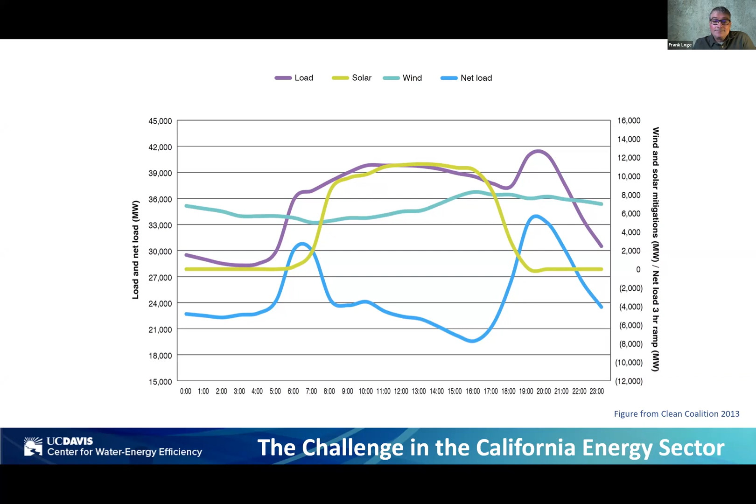This is because of the integration of renewable energy into our statewide electric grid. The problem is that as this belly gets deeper, it's very hard for the statewide grid to provide electricity during this ramping period, which occurs around 4pm and extends until about 8pm. This ramping period represents when everyone gets home from work and turns on lights and starts cooking and other things.

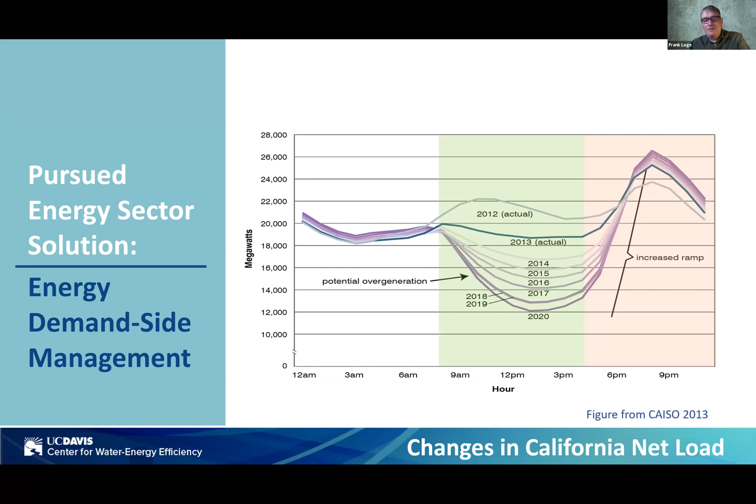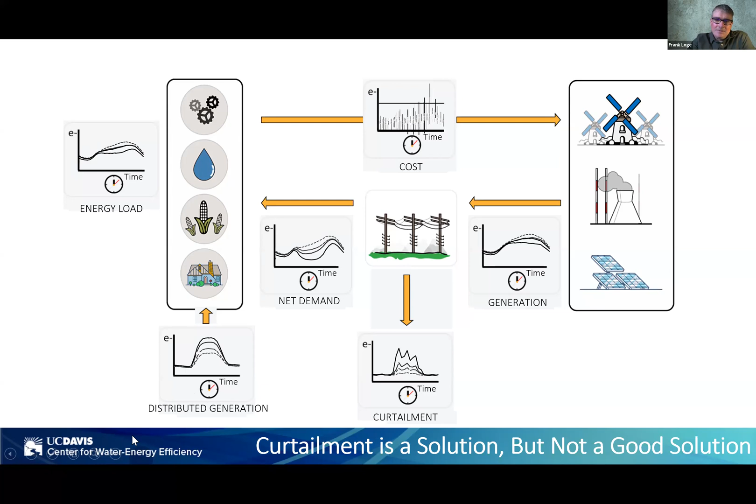You also have distributed generation of electricity, through wind and solar. So the schematic down on the bottom left is showing the electricity that's generated through renewable sources.

Hold on, my screen, I just have a technical detail I'm going to have to fix here. Excuse me just for a second. Sorry, my screen is frozen. So this is one of the challenges from working at home because I have no IT support to help fix this problem.

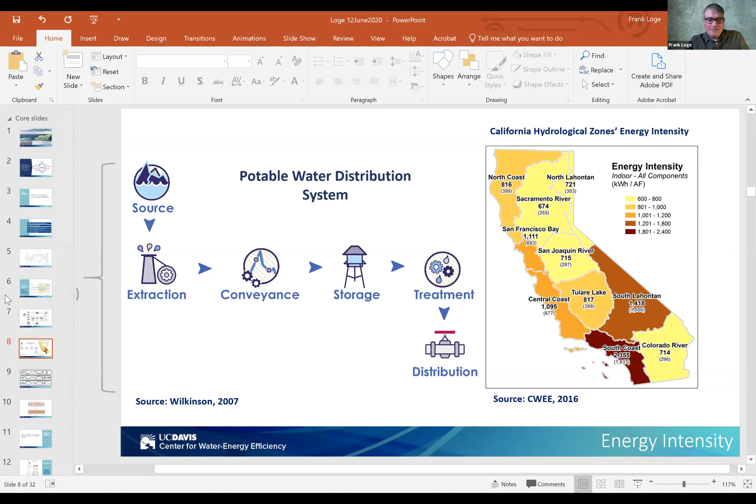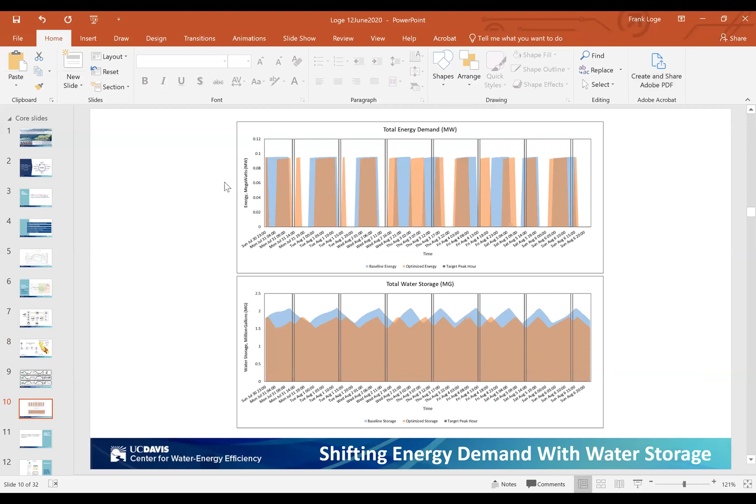Professor Loge, is there something we can help with? I don't think so, I can't advance my slides. We're seeing the slides and that they are advancing. Maybe they are advancing. Yes, they are. Oh, okay, then my screen on my side is completely frozen.

Monica, can you go ahead and discontinue sharing with me real quick, and then I can also share the presentation, Frank. Let's just see real quick if you could just stop. Monica, if you could just take the screen from me. Sure, real quick.

There is Professor Jurgen, if you have the PowerPoint presentation maybe you can start sharing. Do you see the presentation? Yes, we can see the presentation. Professor Loge, can you see the presentation? No, I just still see my frozen screen.

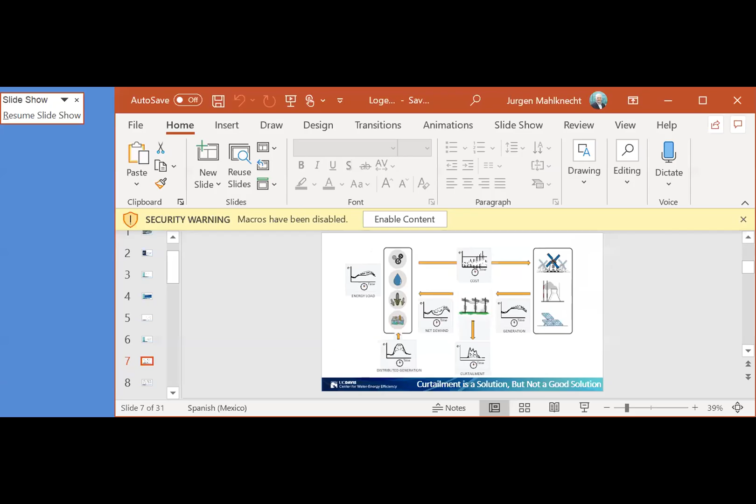Okay, don't worry, we can take a 5 minute break. Maybe this can be fixed if you leave the meeting and come back again, if it's possible. I don't know how your computer is. Yes, I'm sorry about this. Okay, I will do that right now. Yes, thank you.

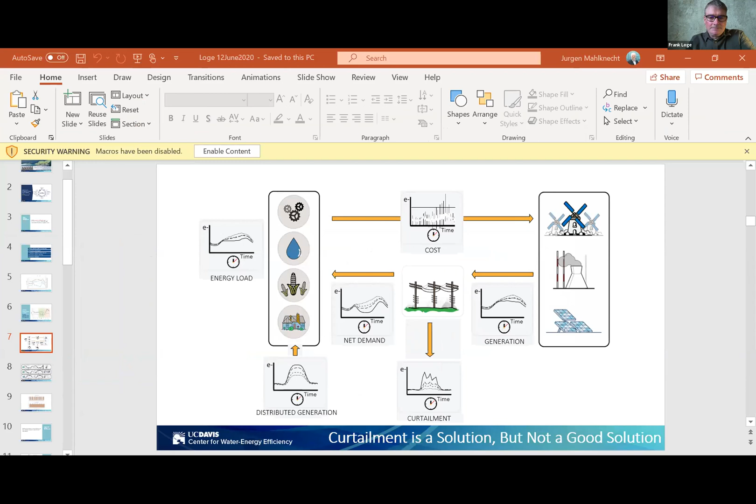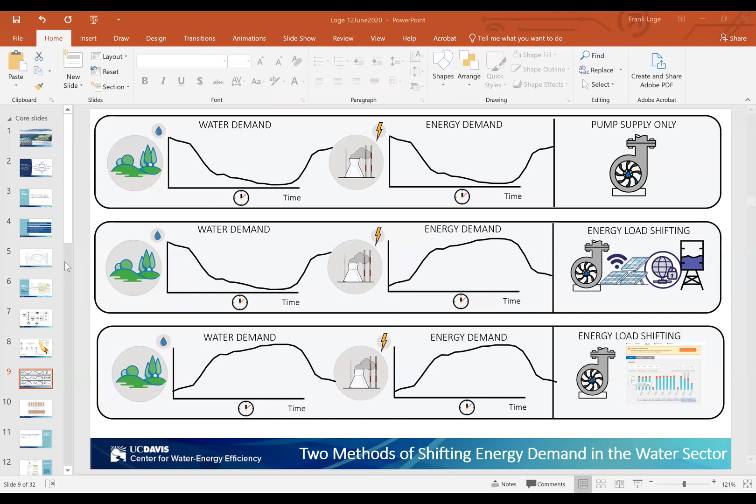Professor Jurgen, maybe while Professor Loge reconnects himself, you can tell us something about the water center in Tec de Monterrey. Okay, actually... okay, it's unfrozen. So let me, let's try again. If there's a problem still going on, I will disconnect Facebook Live. That would be easier, there are not so many people on Facebook Live. Okay.

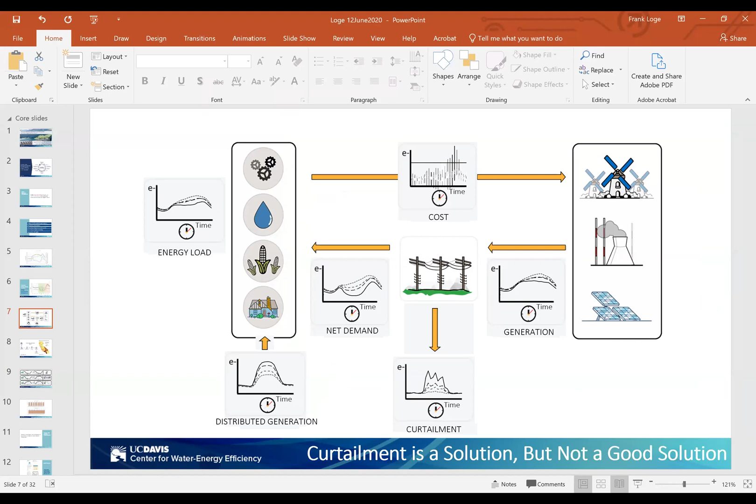So coming back to this, this is the worldview of the operators that operate the statewide electric grid. In this box right here, you have demands, the demand of electricity from these different sources. You also have distributed generation of electricity, through wind and solar. If you add these two together, you end up with the net load or net demand, which is shown over here, very similar to the slide I just showed you previously.

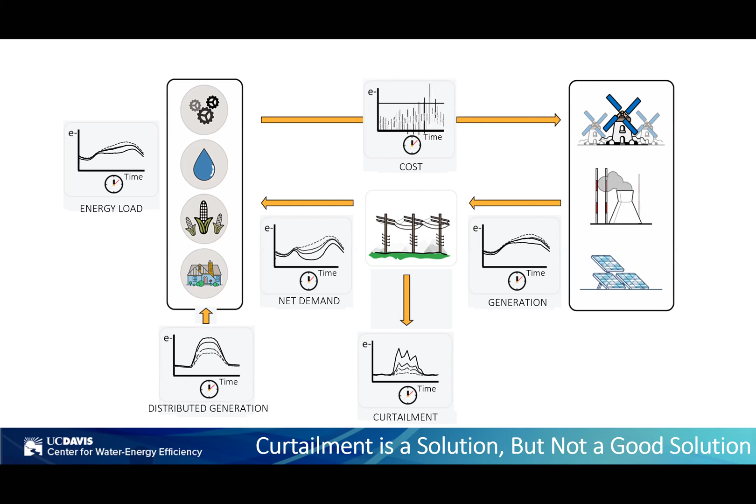On this side of the screen, you have different sources of producing energy. Here I have shown wind and solar, but also this could be a coal-fired power plant, a natural gas power plant, or a nuclear power plant. These different sources produce energy that goes onto the grid, and the energy that is produced needs to match the net demand.

If these two don't match, then what happens is we enter into a process called curtailment, where some of this electricity is shed off the grid so that this electricity profile matches the net demand. These two have to match each other because you do not want excess electricity on the grid - that'll cause things to break. And you don't want less energy on the grid because then you'll have brownouts or blackouts. What we're finding in the state of California is that curtailment is happening more and more often as we put more and more renewable sources of energy on the grid.

Why curtailment is bad is that we are not using that electricity. So in the state of California, when we curtail electricity from our grid, what we're doing is giving it to another entity, most commonly the state of Arizona. And what's surprising is that we don't charge them for that electricity, and we don't give it to them for free. We actually pay them to take our excess electricity. So curtailment not only comes at a cost to California, it's also bad because we're not using the renewable energy we're generating. We're actually paying someone to take it. This makes it very challenging for us to add additional renewable energy to our electric grid because we don't have the ability to use it when it's generated.

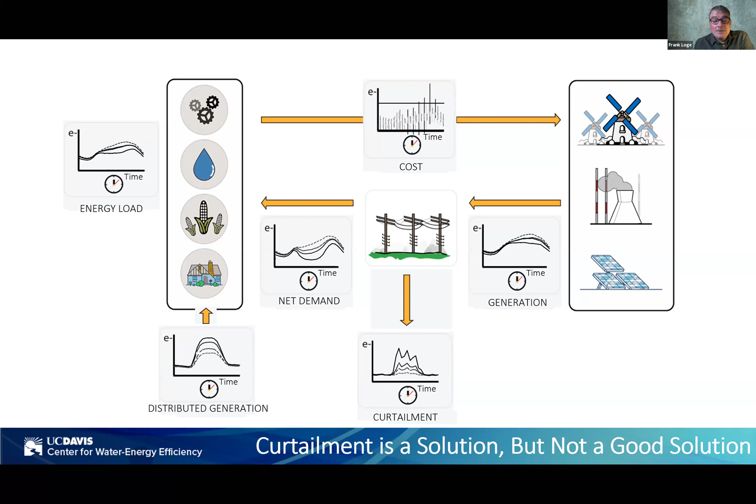So that's the big challenge with the integration of renewable energy into electric grids.

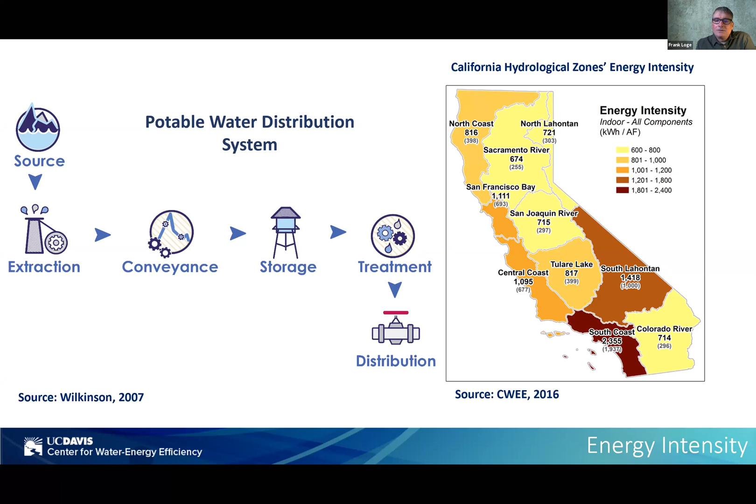So the focus of this webinar is to look at how we might shift when we use water in an effort to shift our electricity use in water and wastewater systems. The potential amount of electricity we could shift is 20% of the overall state's electricity use, which is quite large. Now, there are two different ways that water systems can shift their electricity demand.

So when there's less water demand, there's less energy needed for the water system to source the water, convey it, store it, treat it, and then send it to the customer. When there's a high water demand, there's a higher energy use. Generally, water systems of this type operate with pumps to move the water from its source to its final location, and pumping is primarily the user of electricity in water systems.

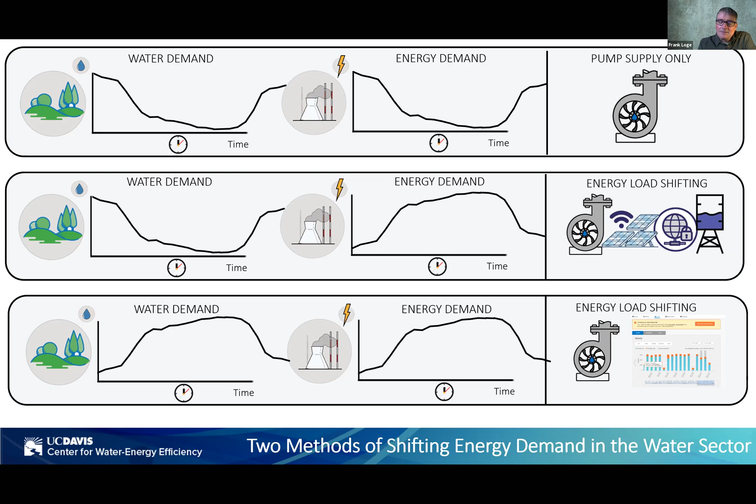Therefore, we would like you to shift how you use your water. That's the topic of today's webinar. I'm going to go through 4 case studies, if time permits—I'll certainly get through three. These are case studies that illustrate different ways that water agencies can help encourage water customers to shift when they use water. By shifting water, they are shifting the electricity needed for that water, which is helping the integration of renewable energy into the electric grid.

So the first example I will give you is an ongoing project that we have with the East Bay Municipal Utility District, which is in the San Francisco, Berkeley area of California. It's a very large water utility, and they are actively attempting to practice water demand management through what they refer to as water reports.

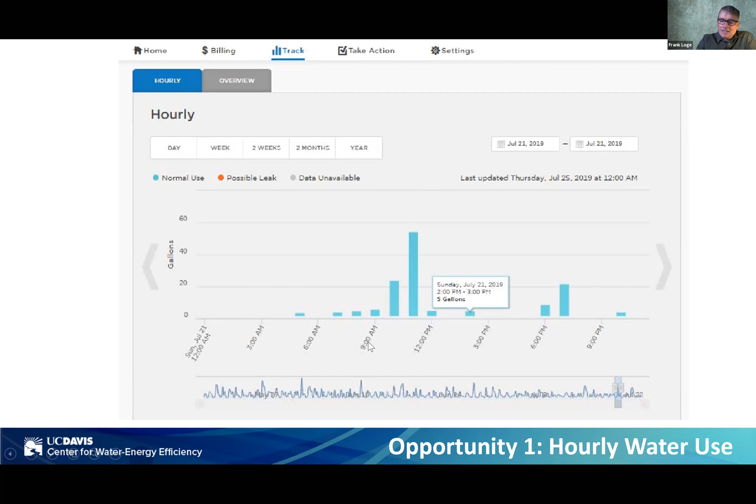The messaging also provides information on how you compare to people like you. The definition of like you, I can get into at some point if you'd like. This right here is this account, so this is me. This is the average of people like me. And this is the best person in that group. So it's comparing me to the average and to the best person. The intent is that if I can understand how I'm doing relative to others like me and the best person, this information might begin to motivate me to change my behavior.

This is a frowny face, if you can't tell. If I were this person, I would have a big happy face. And if I were this person, I would have a somewhat happy face. What they've found is this type of messaging is very effective because inherently we are all very competitive, just being humans, and we like to be good at whatever we do. So this type of messaging has proven to be very effective in encouraging people to modify their behavior.

The one other example here, they do send alerts. This is just an example of one type of alert they send, and this is a leak alert. They send this alert in two different ways. Over here on the left is just a very simple message they will send saying, hey, we think you have a leak. It's estimated to be at 609 gallons over 23 hours, and it's about a 27 gallon per hour leak.

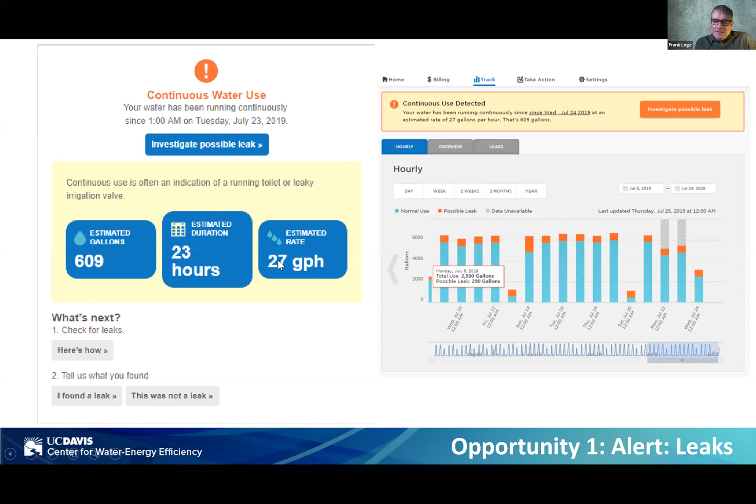So East Bay Municipal Utility District rolled this water report software out to all their customers. They have about 300,000 customers in the Bay Area in California, and they've done this as part of a pilot program to understand whether or not it's effective. The graph I'll show you next is data obtained as part of this project. This is an ongoing project, and this data is about 4 days old. One of the bars is not showing up for some reason.

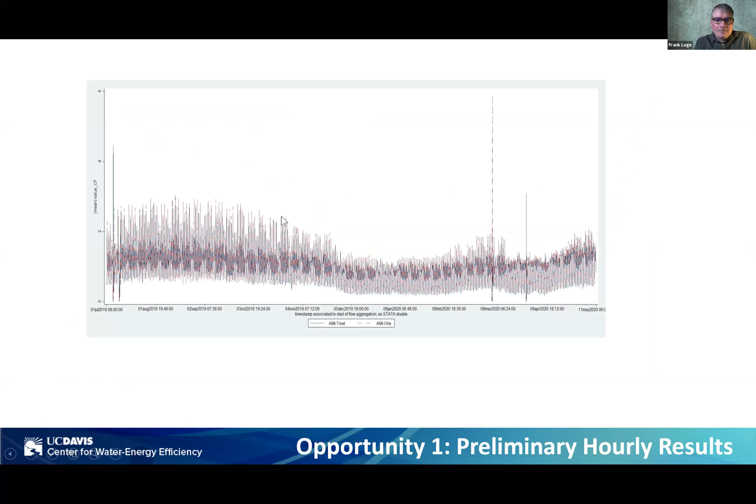Right around this period, if I were to draw a vertical line down, this is when they made the portal active. What's shown here is water use, expressed on a 100 cubic foot basis. So 1.2 is 1.2 times 100 cubic feet. We call it CCF, it's really confusing, I know. This is how we deal with water volumes in California, but it's 100 cubic feet of water, and shown here are different days over the course of the study we've collected data from so far.

So right around here is when this water report was rolled out. Shown in red is a group of people who did not receive the water report, and shown in blue are the people that did receive it. What you'll see is once the report was rolled out, there's a separation between the red and blue lines, which indicates that the water report is helping reduce water use. That difference is on average somewhere between 4 and 6%. So by messaging water customers information about what water utilities would like them to do, you can begin to get responses that make customers shift their water demand.

And through this process, you can have messaging that encourages water customers to shift when they use water, so that you can modify how the water utility uses electricity to help the water utility use electricity when there's quite a bit of renewable energy on the statewide electric grid. Why that's so important is that it keeps that renewable energy on our grid so we don't have to pay someone else to take it off our grid. The example I gave was the state of Arizona.

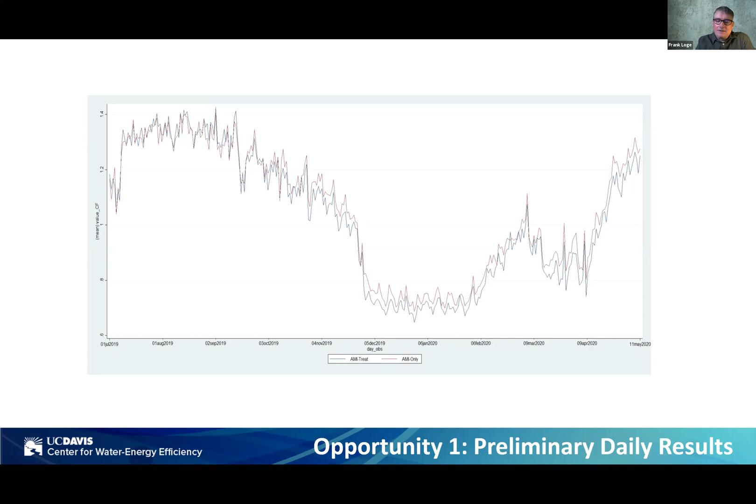The next case study I'd like to highlight is an opportunity for helping encourage water demand management as a way to shift electric load. The example is high resolution hydraulic modeling, and how that can help identify specific customers to target in your messaging to help get some sort of response. The response we'd really like is for water customers to shift when they use water, to shift when electricity is needed.

Shown here is the water use for different sectors, in this case for the East Bay Municipal Utility District. They have residential indoor water use, irrigation, commercial, industrial, public, and institutional, and the darker green line is the total water use. This is the water used in million gallons, expressed as a function of time over the course of a day. The main point is that different water customers use water at different amounts and at different times throughout the day.

So you can begin looking at a graph like this to understand the messaging I just showed you, these water reports. You might not want to message all your customers around their water use. You might want to target a specific class of customers that either uses a lot of water, or uses a lot of water during a certain time of day. All this data is not from a hydraulic model - this is just empirical data collected from the water utility.

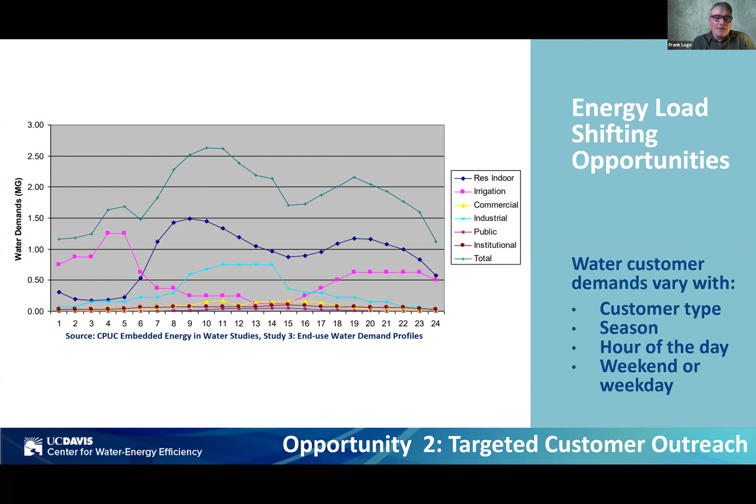What hydraulic models can help do - and this is an animated feature here - is shown with this pump within a particular area of the East Bay MUD service territory. This pump is providing water to each of these dots, which are connections where water is taken off. You can think of these dots as either a residential house, a commercial building, or an industry. The hydraulic model develops a forecast of how this water is moving throughout the water system. The red represents the dots that receive a lot of water from this pump, and the dark blue represents areas within the water system that receive none of the water from this pump.

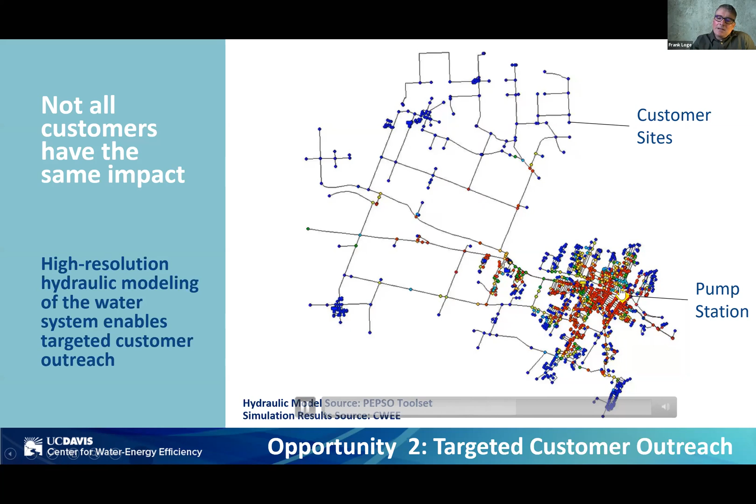So if your goal is to shift the use of electricity for this pump, you can use this model to specifically target your messaging just to the customers represented in red on this schematic. The hydraulic model, through high resolution modeling of how water moves through the system, can now help target that messaging to the actual customers that will have the greatest impact on electric load shifting for a particular asset. In this case, the asset was an individual pump, but you can define how you target water customers based on multiple assets and a whole range of criteria.

Why this has become important is that messaging through social media or electronic means like emails or web portal access is low cost and easy to do, and you can target an entire city, but the uptake rate of that messaging is generally very low. So I might provide the city of Monterey a web portal for everyone to look at their water use and message around that, but the actual number of people who look at it is generally very low - on the order of 5 to 10% of a community. Whereas if you send everyone a physical mailer that comes in the mail, the uptake rate is generally 100% because everyone gets it.

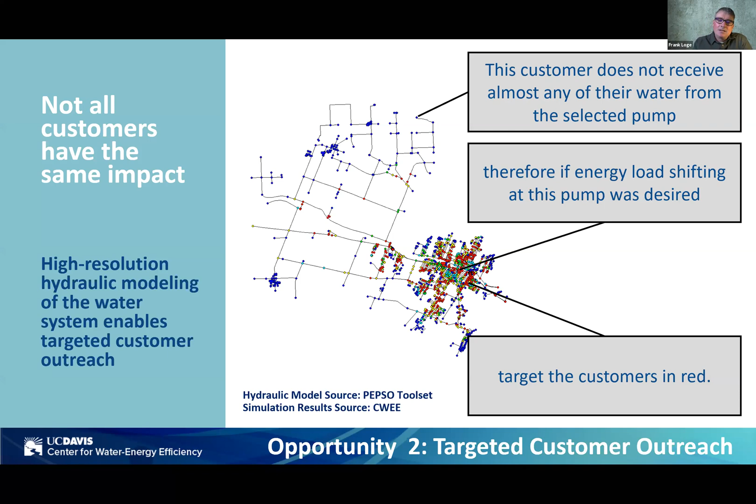A very large number of people will read that, which is what we have found. But mailing things comes at a cost. So having information about where to target those mailings is highly effective at helping reduce the cost of a program you might roll out, messaging around how water customers might use their water in different ways.

The third example I'd like to talk through is irrigation scheduling. I think this is somewhat intuitive to understand, but if you schedule when irrigation occurs, this is a direct way to manage water demand by scheduling when irrigation occurs and does not occur.

This was a project that we worked on with the Moulton Niguel Water District, which is in Southern California, right next to the city of Los Angeles. This is a representation of their water system, which receives recycled water. They collect their wastewater, treat it to a very high degree, and put it back not into the potable water system, but into a recycled water system, sending that water out to irrigation customers.

This is their service territory, and each of these green dots and gold dots are accounts that receive some of this recycled water and use it for irrigation. These P's here are parks, but all the other green dots are other types of users receiving recycled water for irrigation purposes. So they have quite a few users of recycled water using this water exclusively for irrigation.

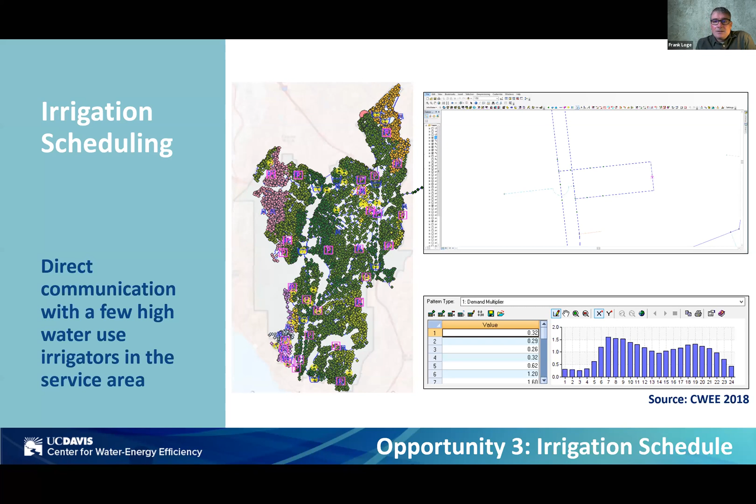This is a great example of an opportunity to target all these different customers to encourage them to time their irrigation to correspond to some criteria the water agency wants to achieve. In this case, we're interested in shifting the timing of their irrigation to shift the electric load within the water system. Shown here is the total amount of water used across all accounts, expressed as gallons per minute as a function of time over the course of a typical day.

The hashed part here is the existing demand, and the part shown in gray is the demand once shifted. So what we've done is encourage people to shift their irrigation out of this time period and over to this other time period. You can see the amount of water we've shifted is actually quite small, and I'll show you some results of shifting a small amount of water. These results would be considerably greater if we had encouraged water agencies to shift more water.

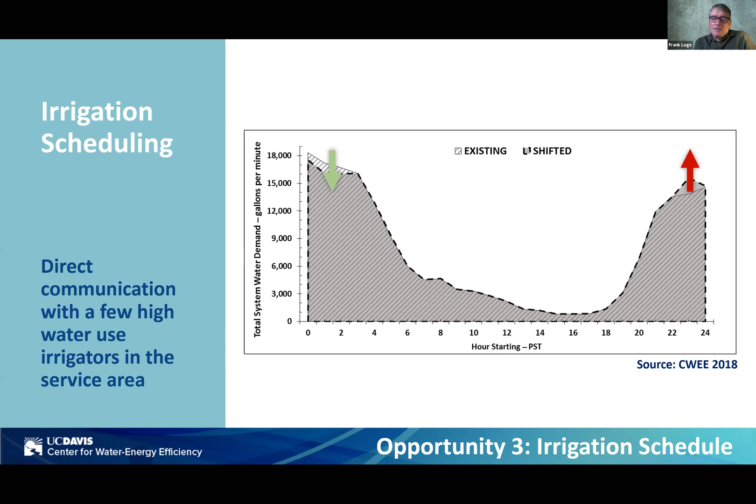The challenge we found is that most of the very large water users in the Moulton Niguel service territory that use recycled water are golf courses, and it's very hard for them to water in the middle of the day when people are playing golf. Currently they water mostly at night. So our ability to shift a large amount of water in the service territory was limited by a few very large users that did not have the ability to shift water, but for those that did, we shifted that water.

I'll show you two schematics to illustrate this. First, we went through and took their existing recycled water system and optimized it to maximize the amount of water stored in reservoirs and containers to help shift electric load. Then, on top of that, we shifted demand by reaching out and encouraging people to modify their irrigation timing. This line shows the results of total water pumped, total energy consumed, and total greenhouse gas emissions in metric tons of CO2 equivalents from optimizing the water system but not shifting their demand.

Just by helping change the operation of their system to encourage storage during certain times of the day, we were able to reduce the total amount of water pumped by 24%. We reduced the energy used by 17.97%, corresponding to about a 22% reduction in GHG emissions, which are associated with the electricity we reduced.

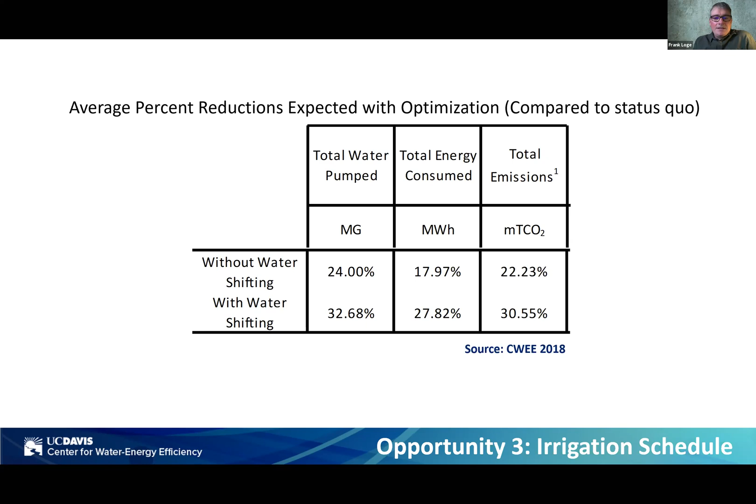Now, if we shift irrigation demand, we achieve these numbers here, which are greater than just simply optimizing their system around storage. So we achieved a huge amount of savings in both water, energy, and GHG emissions by timing when irrigation occurs within the recycled water system.

For the sake of time, I will skip this slide.

I want to go on to the fourth case study. I put this one in because it's not really an example of water demand management, but it's a nice example of how you can think outside the box when you recognize the value of water demand management and helping shift electric loads. If you can't shift water demand, maybe you can do some other things to still achieve the same outcome: shifting the time that a water agency uses electricity off the electric grid.

This example is not with a potable water system, it's with a wastewater system. In this wastewater system, we built and then installed a microgrid to help modify when electricity is pulled off of the statewide electric grid and used to treat wastewater.

This project that we completed was at the Laguna Wastewater Treatment Plant. This plant treats water in Santa Rosa, a city right next to Napa Valley, where we produce a lot of wine in California—so this is in wine country. The wastewater treatment plant serves roughly 230,000 customers, so it's quite large, and it treats on average about 17.5 million gallons of water per day.

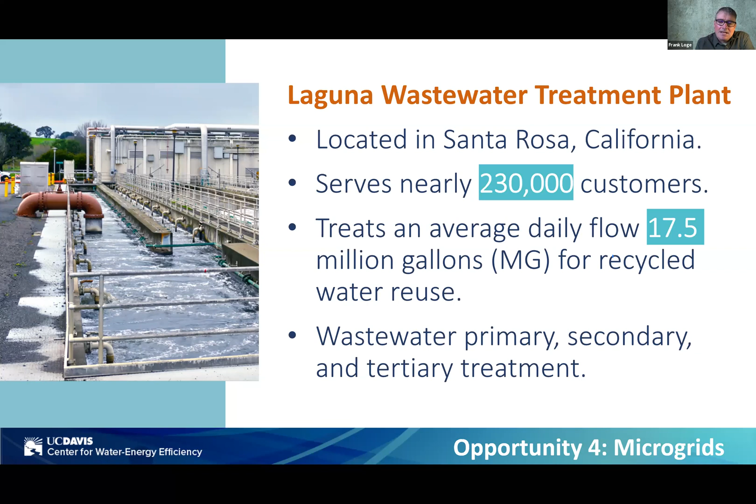I know this is busy, but this is really intended for those of you interested in wastewater. This shows the unit operations and unit processes in place at the wastewater treatment plant. Wastewater enters here, passes through screens, grit removal, primary clarification. All the boxes in gray are typical of a wastewater treatment plant in terms of the unit operations and processes necessary to treat wastewater, and all of these have some type of energy expenditure or energy load associated with them.

Down here is the sludge treatment. The solids collected in the primary and secondary clarifier go to an anaerobic digester, and this is the treatment train for the anaerobic digester.

The elements shown in dashed boxes are what we added to constitute a microgrid at the wastewater treatment plant. We put in a flow equalization basin, where you can divert raw wastewater into this basin so it doesn't have to go through the treatment train. In doing that, it's a way to store water so you don't have to expend energy to treat it. At some later date, you put it back into the system and treat it, and then your energy expenditure goes up—so it's a way to shift electric load simply by storing water.

Unlike potable water, where you can encourage people not to use it, it's very hard to encourage people not to generate wastewater. But a flow equalization basin is a way for a wastewater treatment plant to help encourage that kind of behavior. We also put in a very large battery on site, and a cogen facility that uses the methane from the anaerobic digester to generate electricity. So these three elements constitute the microgrid that we created on site.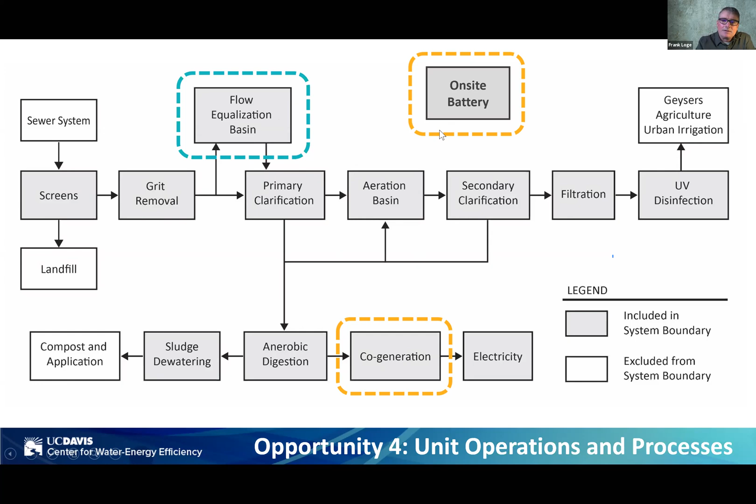These are schematics of each of these different elements: this is the flow equalization basin, this is the battery bank, and this is the CHP, or combined heat and power—the cogen facility. I'll refer to it as the CHP.

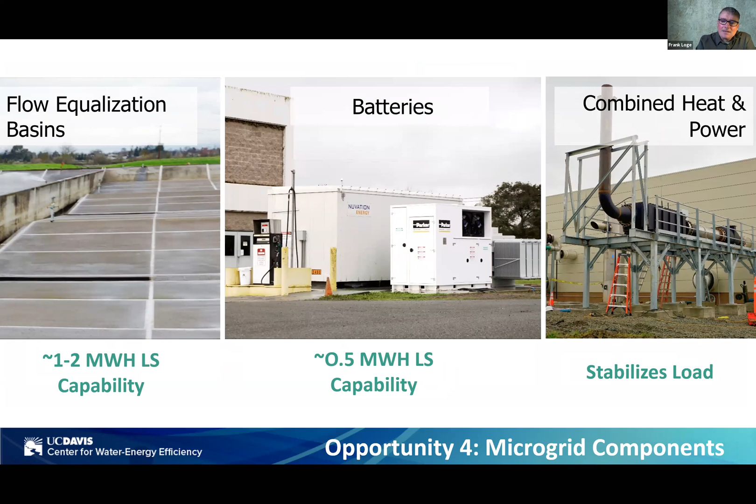So it's being very beneficial to the statewide electric grid, but the microgrid is achieving that reduction of energy pulled off the grid by generating and storing energy on site. So it's achieving the same outcome as water demand management, but with different means.

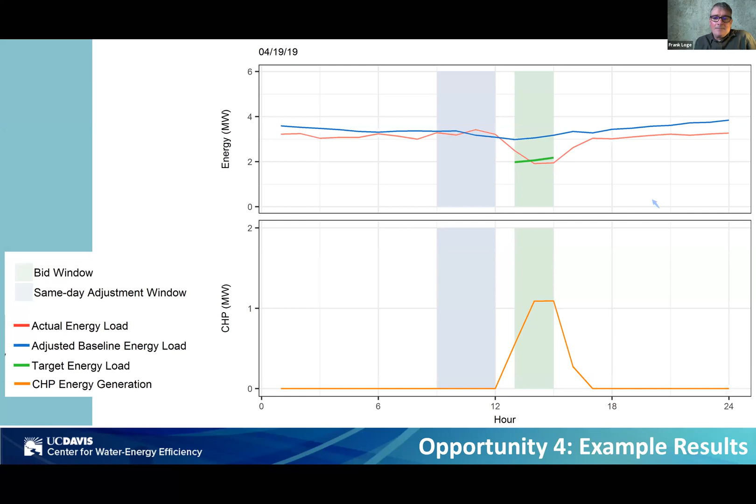I wanted to put this in as the last example to help illustrate that microgrids can be very effective as well in helping modify energy demand to achieve goals stipulated by large-scale electric grids, like at the state or federal level.